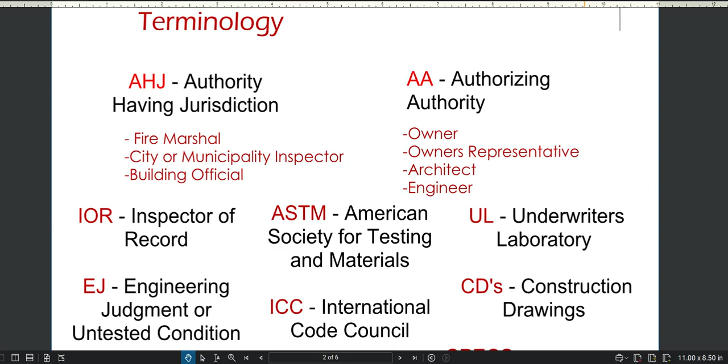because it makes it go much smoother as an entire project to say, oh, problem, and not get in arguments with contractors and inspectors and everybody saying, no, my opinion is this, mine's that. Let's go straight to the source. Let's follow the chain of command. Let's get this ironed out in writing and understand an efficient process for all parties involved. Very simple. So below that, we also see other terminologies.

An IOR is something that may not be required in your industry. In some states, there is an inspector of record that oversees large amounts of inspection on the project. So they might do framing or just fire-related items, and they might have a special inspector below them doing firestop or fireproofing. So the IOR holds a lot of responsibility on a project when there is one. Not all projects require them or states require them, but that's a great starting point.

If I do have an inspector of record on my project and I'm a special inspector, that's really where I start. Say, hey, I got some questions. How should we start working on this? What's your interpretation? They usually have the ear of the authority having jurisdiction. So understand who the IOR is if you have one. If the answer is we don't have one, Brent, but we have a building inspector through the city, that maybe is the person above you to start before we get to the fire marshal, or that might be the final person. Each jurisdiction is different.

ASTM is the American Society for Testing and Materials. So you're going to hear that term come up a lot, but basically it's an association that is developing standards that are followed by the manufacturers or yourself or the contractors or the code. So ASTM standards may be listed in the International Building Code or your specific building code. Those are standards that are adopted and voted on and developed for years upon years.

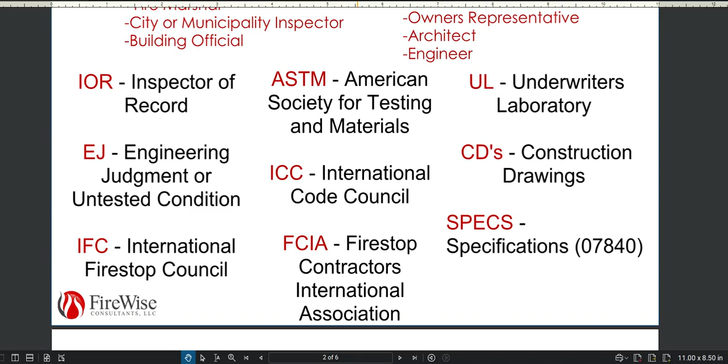And then specs, we already talked about that earlier, but as a reminder, when I say the word spec, that'd be your project specifications. And Firestop does have spec section 07840. It's not a code requirement, but it's a great process to sit down and review before we start a project in any role that you have, especially as a contractor, because you'll find many specific items sometimes called out that differ from job to job in the specs as it relates to Firestop. So a couple key terms, again, that you're going to see over and over again.

Well, annular space. That's one of the most imperative steps of a through penetration, the measurement from the outside diameter of the penetration to the inside diameter of the wall or floor or sleeve, basically where the Firestop goes. It's a step that's often overlooked, but an imperative one once you learn the test standards, a good focal point of inspection, especially why in my personal opinion visual inspection matters so much, because we can check off so many more boxes as you'll learn in the inspection standard and how to read a system section. But annular space is that distance as shown on the left from the pipe to the barrier itself.

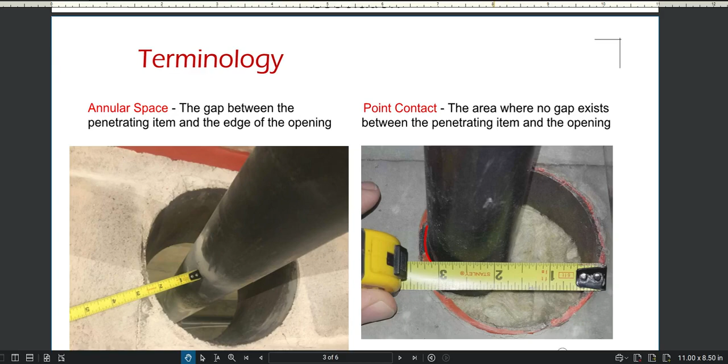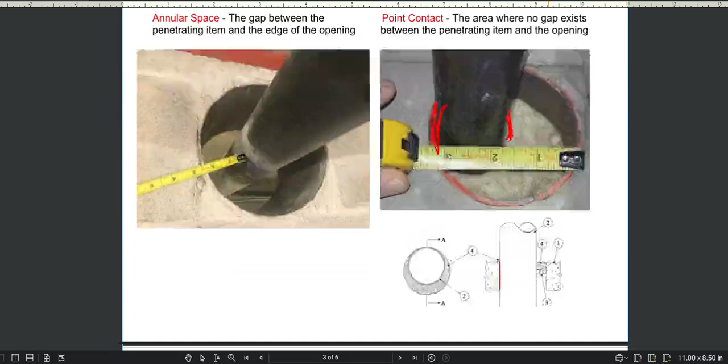Point contact is going to be where that red line is shown, somewhere where the penetration touches the barrier. So this is point contact because it's touching on one side. If it's touching on another side, we have a potential problem, as we'll cover. But it may be allowed within the system to touch on one side of the barrier. So sometimes drawings, and this is a snapshot of what a section view of a Firestop system shows, may allow point contact in the drawing, may even show some material. So again, we walk through all this at great length and how to read a system and how it relates back to your inspection. But annular space and point contact, key terms you're going to see over and over again within the literature.

Additionally, we're going to find backing materials called out. So this does talk about different types of backing materials. Sometimes Firestop requires a backing material. It requires it installed in a certain orientation and compression. All these different elements may be called out in your system. Sometimes it's just optional. It just says, yeah, you can have it if you like.

So again, please note that these materials are going to be specific to even sometimes a part number. So just because I'm using mineral wool doesn't mean it's acceptable mineral wool for every installation. So with that, I think we can try to watch a video here. Let's see if it works out for us on how mineral wool is made.

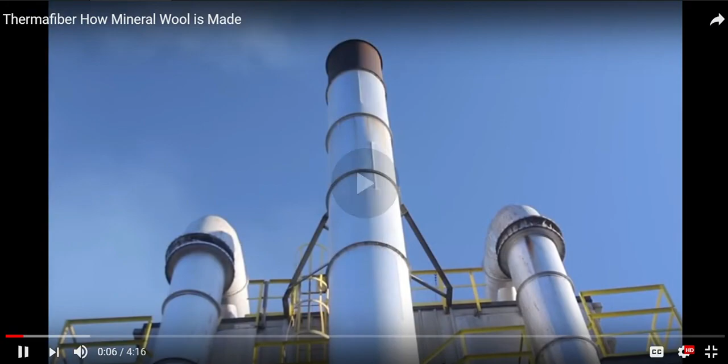Founded in 1934, the Thermafiber plant in Wabash, Indiana, has been producing world-class fire safety and acoustic insulation materials for over 78 years. In the early days, local limestone was quarried as the primary key ingredient in our mineral wool. Today, smarter, recycled alternative materials are used in the production, saving our precious natural resources. Let's take a look at how our mineral wool is created and processed into the many products of Thermafiber.

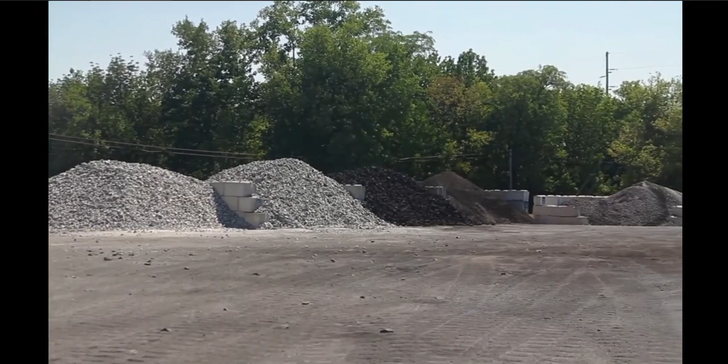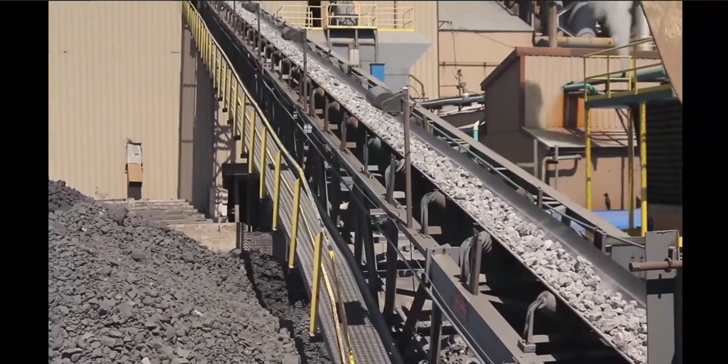Our process starts here, in the piles of slag and other rock. The slag is received daily from various local steel manufacturers. Slag is a byproduct of the steel industry that otherwise would be discarded into landfills. Our insulation products contain a minimum of 70% recycled content, and we offer products with up to 90% recycled content. To begin, slag and other types of rocks are lifted through a series of conveyor belts and dropped into large furnaces called cupolas. The cupolas are heated to over 2,600 degrees Fahrenheit by burning coke, a form of coal.

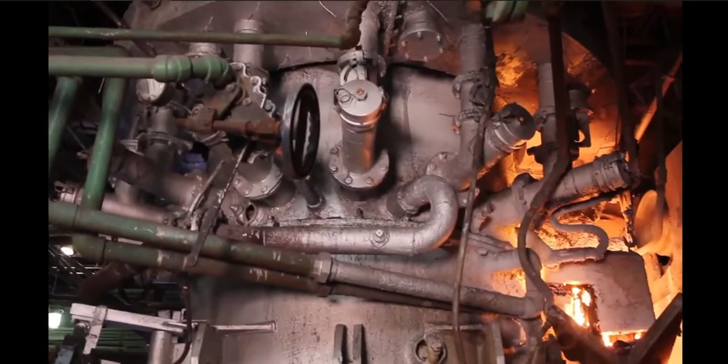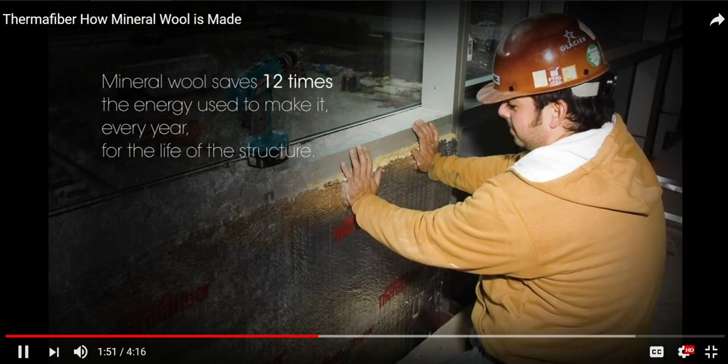These cupola furnaces take several hours to heat. Once they're up to temperature, they will run 24 hours a day for 6 days at a time before they're allowed to cool for cleaning. This allows Thermafiber to produce several thousand tons of finished products every month. Making mineral wool is an energy-intensive process. However, studies were done that showed the amount of energy used to make 1 pound of insulation is saved in the first 30 days that the insulation is installed in a building. Another way to look at this is mineral wool insulation saves 12 times the energy that was used to make it every year and for the life of the structure.

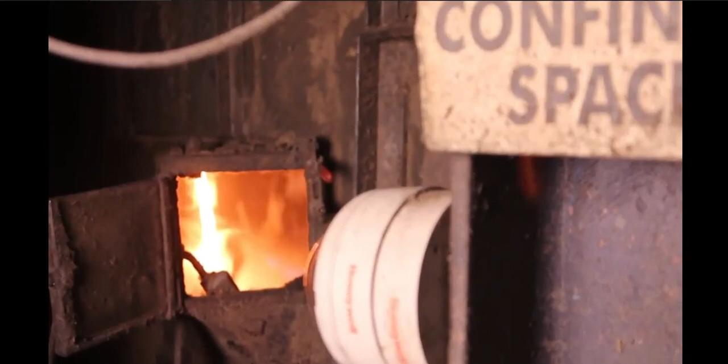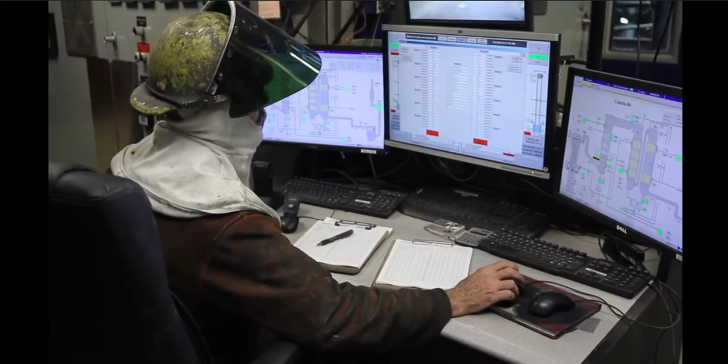Once the slag has reached proper temperature, it will turn to liquid or molten lava. The lava is channeled onto high-speed spinning wheels. These spinners dispense the molten lava in a manner similar to cotton candy. As the molten lava is cast forward, a binder or glue is applied, as it is rapidly air-cooled and collected in a large chamber. The entire process, from slag to final product, is monitored here in the cupola control room. A high-tech series of computers and measuring devices ensure a consistent quality product.

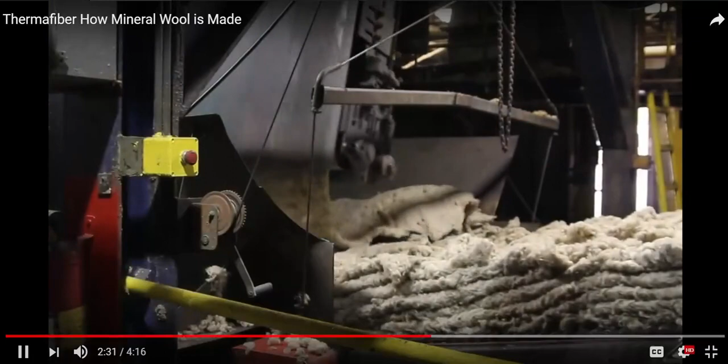So I like this section, this video. Again, this video is brought to us by Owens Corning Thermafiber. So it's a nice process to show how mineral wool is made. We have a whole separate video and section on mineral wool and its importance and how it relates to Firestop. I like to show it here because it's something that's going to come over and over again in your information and education. A lot of people assume that any mineral wool is acceptable. It says mineral wool, just use any 4 pound, 2 pound, I don't care what it is, just use mineral wool and just throw it in there.

Well, sometimes it's way more imperative in installation requirements, how much, how deep, how it's compressed, and even what orientation. And this video is a great example, it actually shows the grains, the material, as you saw with the cotton candy they used. It kind of binds it together and then it lays on top of itself and then it's compressed down. So many times, not always, like penetrations, not so important, but joints where movement occurs, the orientation of the mineral wool and its grains is imperative. So this is a nice video to show how it's made and then compressed down to different densities. And hopefully that can help you understand further in the training why the orientation and compression of certain types of firestop conditions is so important.

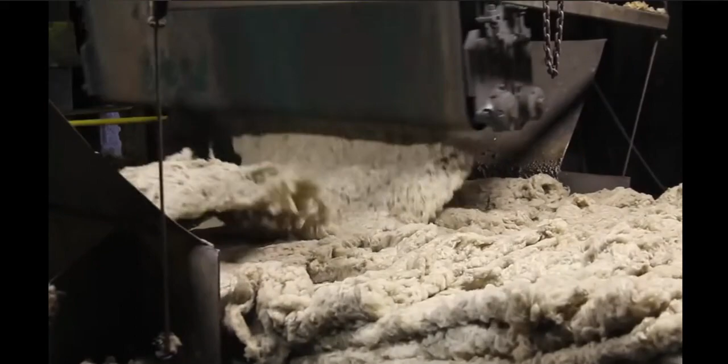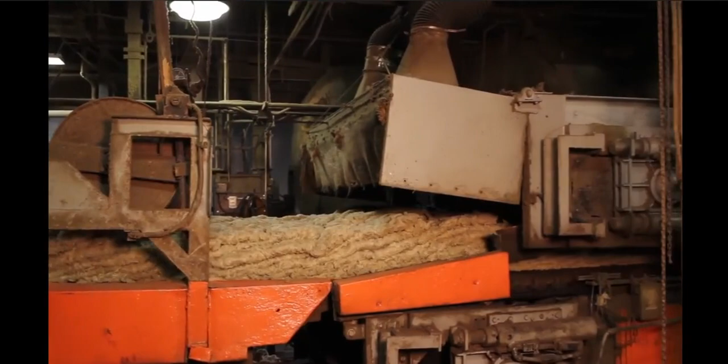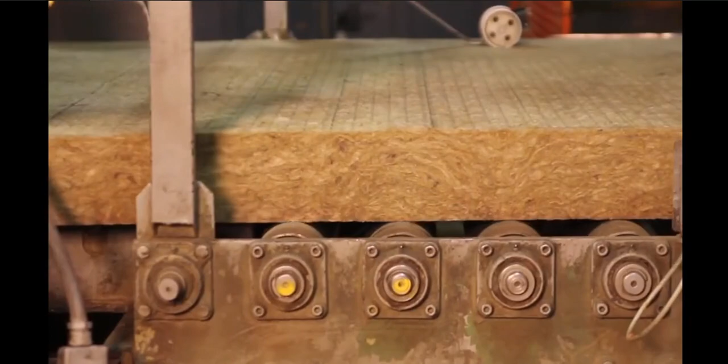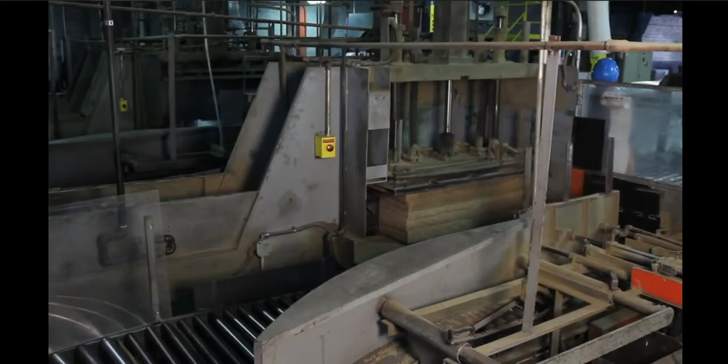The collected fibers form a continuous mat that is moved and layered onto a conveyor by a vertical pendulum conveyor called a lapper. The mineral wool is now run across a series of rollers and into a curing oven where it is slowly heated to 450 degrees to cure the binder and compress the material into the required density and overall thickness. Upon exit of the oven, large saws guided by computers cut the newly cured fiber boards and blankets into various thicknesses, lengths, and widths. These blankets are then stacked, compressed, packaged into bags, and bundled for storage in our warehouse or loaded directly into a semi-trailer for immediate departure.

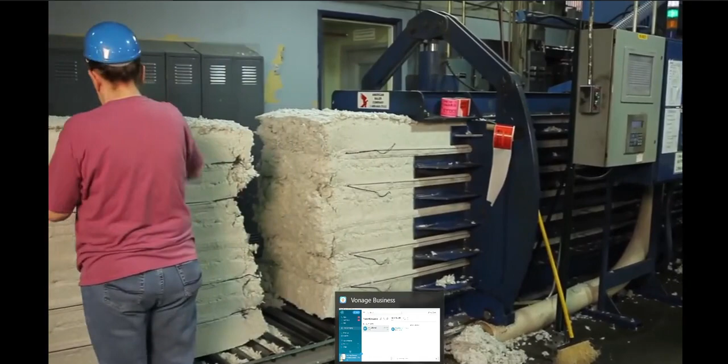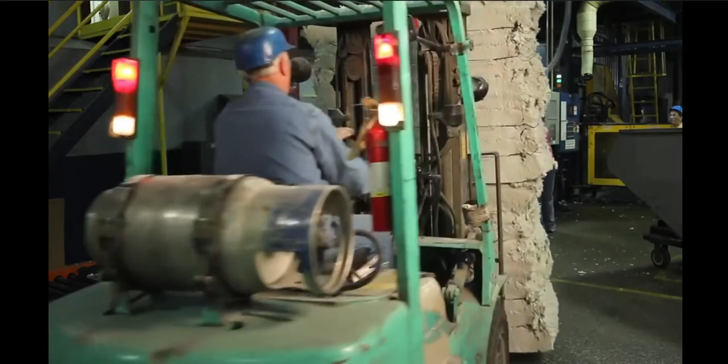In another part of the factory, a different form of mineral wool is being bundled in large bales. This granulated wool is finer and fluffier, but created in much the same way as the other mineral wool boards and blankets. The difference being that no binder is applied to the fiber. These bales are sent to customers that make a variety of products, including acoustical ceiling tiles, brake shoes, and other niche products.

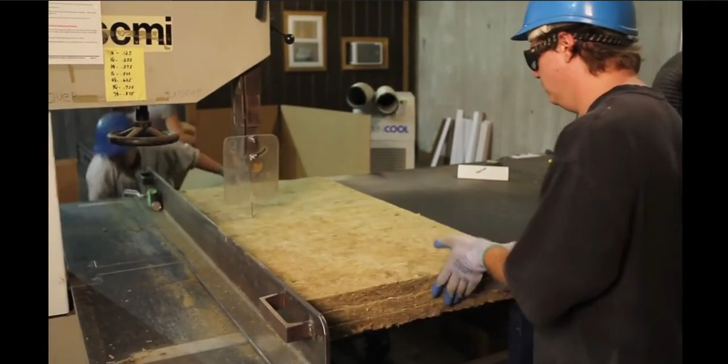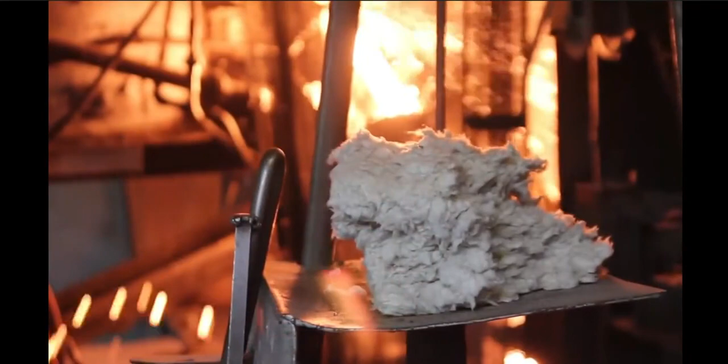In other parts of the plant, high-temperature industrial products are fabricated and custom mineral wool orders are cut, boxed, and processed for delivery. Some finished goods are stored in our warehouse facility, while others are shipped directly to customers. With dedicated employees and 24-hour operations, demand for quality, fire-resistant mineral wool insulation.

All right, so I think it's a video some of us have seen before, but I think it's imperative, as we're going to learn later, that there are many types of backing materials. I like to show you how it's made because it's such an imperative step of fire protection as it relates to fire stop in many of these systems. And many people aren't even aware of how it's made, what it looks like, and its process.

So as you can see, it's laid on top of itself, it's compressed down to different densities. So the material, again, can withstand fire for much amount of time, but movement and gases and smoke sometimes need fire stop as a smoke seal or added seal to help the overall system. Backer rod also could be used. I was on a job just yesterday. They had a vertical wall-to-wall joint. All it required was backer rod and non-intumescent sealant.

So I just said the word spray. There's really no intumescent Firestop spray. You might see intumescent paint where the paint on the steel expands, but typical sprays that are used in Firestop are just more of a smoke seal. Typical sealants used on penetrations may be intumescent, but there are non-intumescent sealants and putties and all kinds of different items that may be acceptable for use in a Firestop assembly.

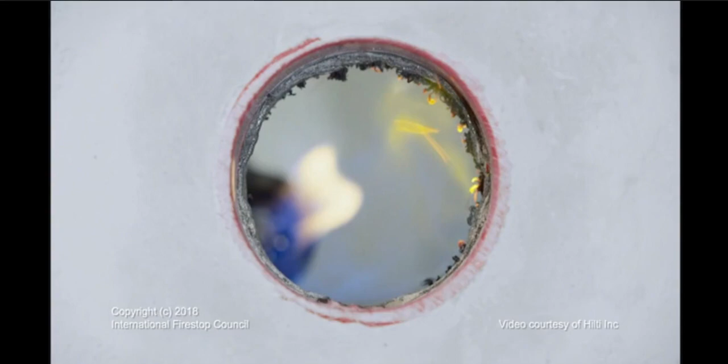So intumescent action of a Firestop device. In this case, it's a cast-in device that you see cast in the concrete floor. Again, the device holds no rating. There's a system that allows specific installation requirements. We're just showing you not a real fire test, but just what happens with intumescent expansion of that device. It almost seals up the entire, I think it's about a 4-inch device, and then starts to push off itself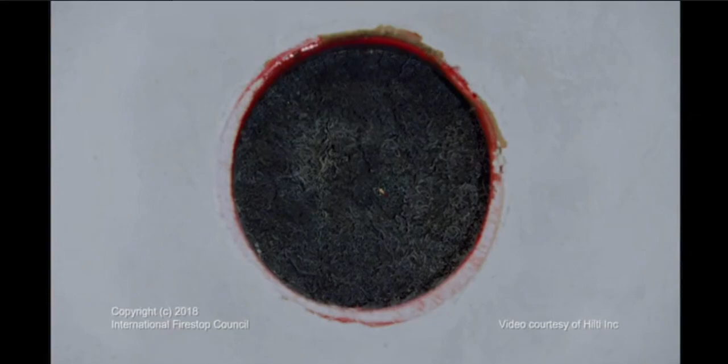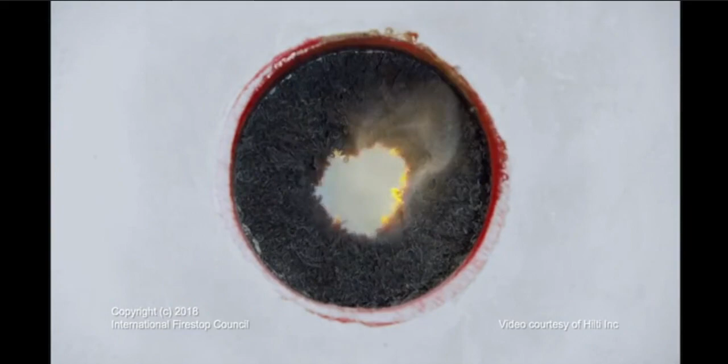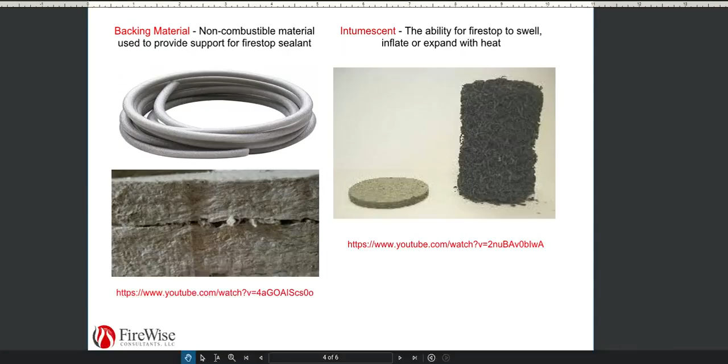and expand outward. So as the material gets hotter, it has to get to a certain temperature to react. Then it starts to expand at different ratios. Some Firestop only expands a couple times its size. This example here is probably 20, 30, 40 times its size. So a lot more expansion, but also may need more heat. Also maybe limited to certain types of penetration. So it all falls back to the system. But intumescent is going to be a key term we keep hearing throughout when we read these systems.

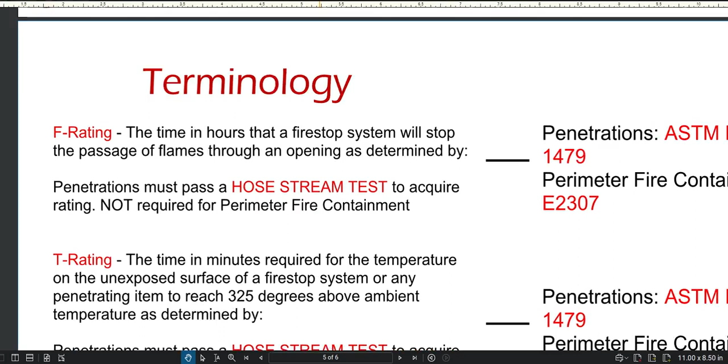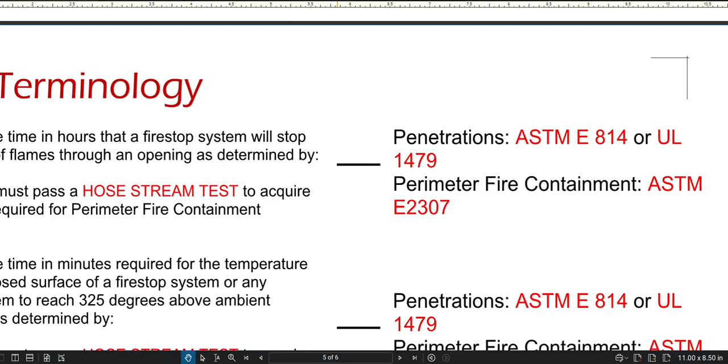A couple other terms that you're going to see over and over again and very important steps to remember is F rating. So the code talks about different test standards, and we're going to have a whole section on this. But the code says within these test standards, it may say you need an F rating of a certain amount to match the barrier. Please note an F rating is a measurement of time it takes for the fire physically to be seen on the cold side of the barrier.

So if we're doing a fire test, fire's on one side of the floor, and we're just standing there, we're waiting for flame to physically be seen through the penetration or joint on the floor above. Then we fail our F rating test in a measurement of time. So we're trying to get 2 hours stoppage or F rating. We need to hold on to it for 2 hours total.

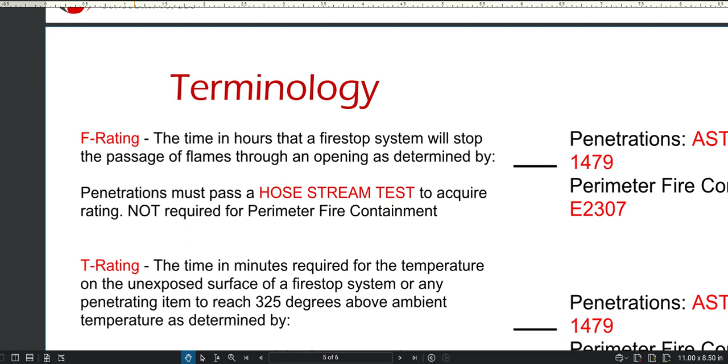Penetrations also have to go through what's called a hose stream test. So we have to pass the fire test and then do it with a hose stream test. Sometimes hose stream tests are not required on certain joints like perimeter containment. So again, we're going to have a whole separate section on this. I'm just kind of touching upon common terminology. We'll teach you more about these terms and what they are and how they relate to the code in future sections.

A T rating, again, is a measurement of time it takes for a penetration, in this case, to get to a certain temperature on the floor above or on the cold side of the barrier for a certain amount of time. So it's measured in time, increments of 15 minutes, on how long it takes for that penetration or joint, depending on the application, to get to 325 degrees above room temperature.

So penetrations may, by code, sometimes require a T rating of a certain hourly rating. Certain joints, like interior joints, may always require a T rating equal to the F rating to get what's called an assembly rating. So a head of wall joint, if it's a 2-hour wall, needs to pass the test for 2-hour fire protection and 2-hour temperature transfer protection.

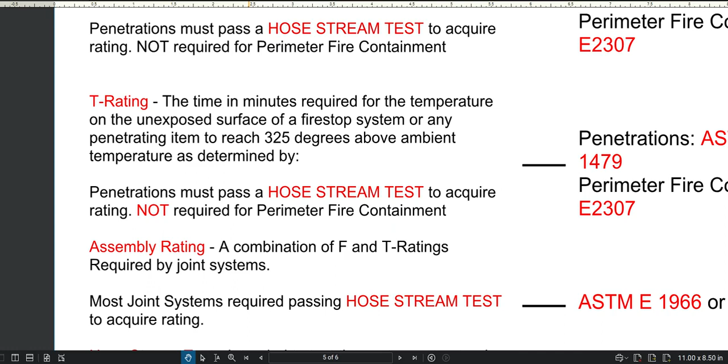So again, some people always associate a T rating only with certain penetrations and floor penetrations and things like that, but the test standard may always require it in different forms. So we'll cover that again in a different section.

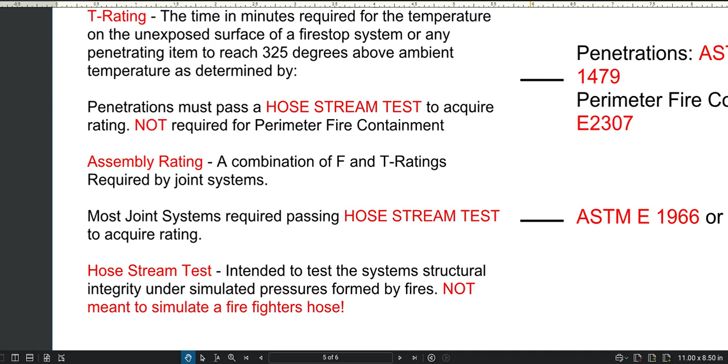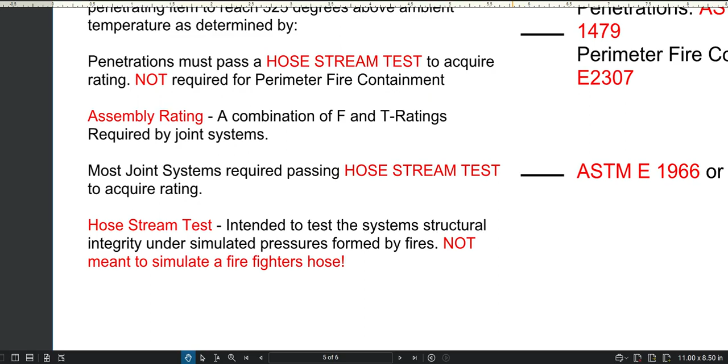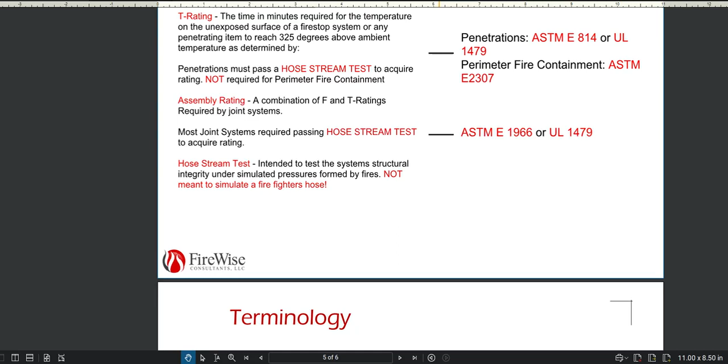Hose stream test may be required on certain types of joints, and we'll cover what that is in a little bit. But note that it's not to simulate a firefighter's hose. We are simulating the pressurization of a fire to make sure the materials stay intact after or during the event of a fire. So it's a pretty rigorous test, which is why the joint distance and annular space is imperative to be followed per the system, and they're always specific because they have to pass multiple steps of this test itself.

Movement does occur in certain tests out there. Cycling is an optional test by the manufacturer for certain types of joints, not penetrations. There is a new test standard for penetrations, but currently in today's code, we do not see movement testing of penetrations, only of joints. We can do a class 1, 2, or 3 movement test.

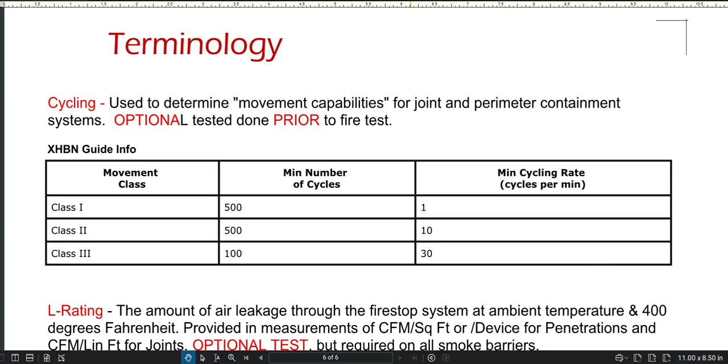It is done prior to the fire test, and it is typically done for a compression and extension ratio or percentages of movement. There's also shear movement for perimeter containment if the floor goes up and down or the facade goes up and down. So again, an optional test the manufacturer can test for. There's a whole separate test standard we're going to learn about.

A couple of ratings you can see on a system: the L rating. Again, an optional test only required by code in certain areas called smoke barriers. It's done separate from the fire test and is measured at 2 different increments: ambient room temperature and 400 degrees Fahrenheit, as in the fire starting in the room.

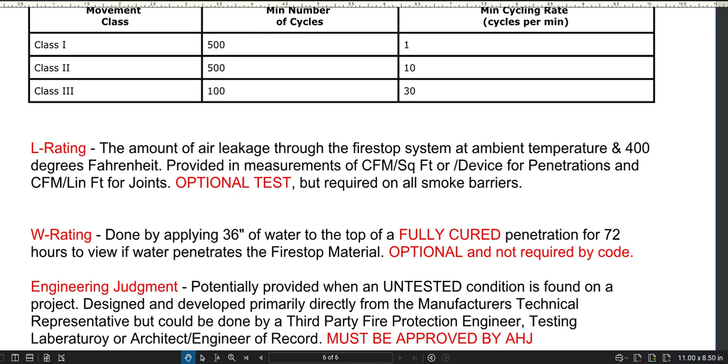It does not test smoke travel or transfer in the event of a full direct fire. So it's testing how smoke travels on day-to-day operations through a penetration or joint, and then, as an elevated temperature in the room starts to occur, how the smoke may transfer through that penetration or joint. So again, optional test; you're going to find many systems don't even have the L rating on it. Just like the W rating, many systems don't have.

That is not required by code, but it's a test that's optional and done separate from the fire test, where they take 36 inches of standing water within a cylinder, let it sit on top of the firestop penetration or joint for 72 hours, and come back and see if any water got through the firestopping material. So a nice added bonus that some contractors or owners might want for areas that might get wet.

But remember, it's once the material is fully cured. So the product does not hold the W rating until then. The product may take days to fully cure, if not weeks. Then I can get a temporary 72-hour test to see if it withstands water. So firestopping materials are not meant for long-term exposure to the elements, only temporary. So please remember that.

EJs, or engineering judgments, for untested conditions, must be approved by the authority having jurisdiction. We've already covered it, and we're going to have a whole separate section on that as well.

So from this, hopefully you understood some key terminology that you're going to find out there in the industry. We were able to break it down generically. If you go through the entire training series here on firestoptraining.com, you're going to see all these broken out in much more depth. We're going to relate the L rating to the code, when it's required, where it's required, how to read it in a system. We'll go through how to do a hose stream test, what it looks like, what the challenges are, all those different elements. So hopefully this starting point gives you a good idea of some of the terminology, and there'll be a lot more to learn down the road.